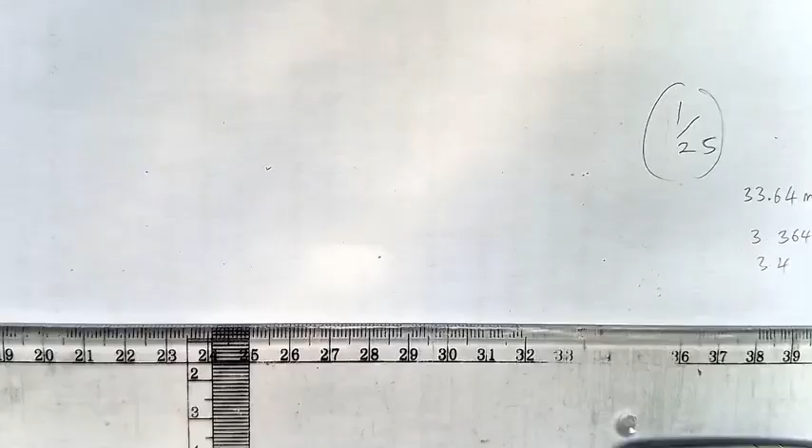From the line here, take your ruler and measure 3.4. So you mark here, this is the 30 point, this is my 30 point here, and 3.4 - this will be it. So here it's my 3.4.

On the other side, what will it be? That is 1189, which gives me 47.5, approximately, like 4.75. So that will be 4.8.

Then take over here, measure 4.8. Measure 4.8 here and draw a line. Take this, then 4.8 also, then close it. So close this place and call this one A0.

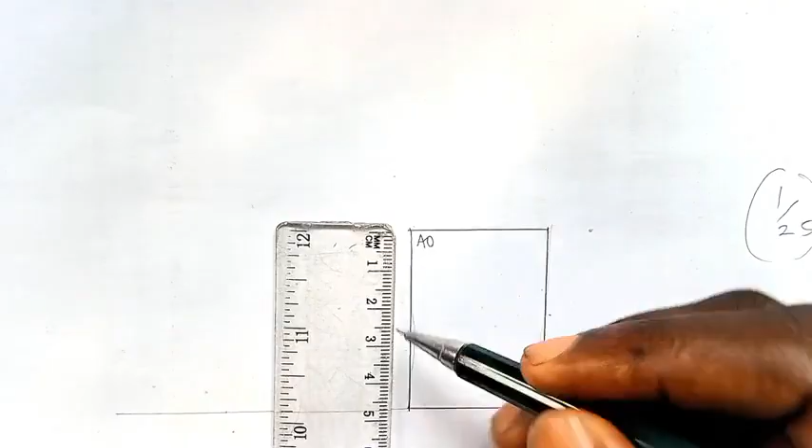Now to get A1, you have to divide it. So you divide the length of this one - that is, let's say 4.8 divided by 2, you have 2.4. So go over and measure 2.4. Then divide this. So this is A1.

Then to get A2, you divide this one. What's the length of this? That's 3.4, so you see 3.4 divided by 2, that is 1.7 approximately... come over and measure 1.7, then do that. So you call this one A2.

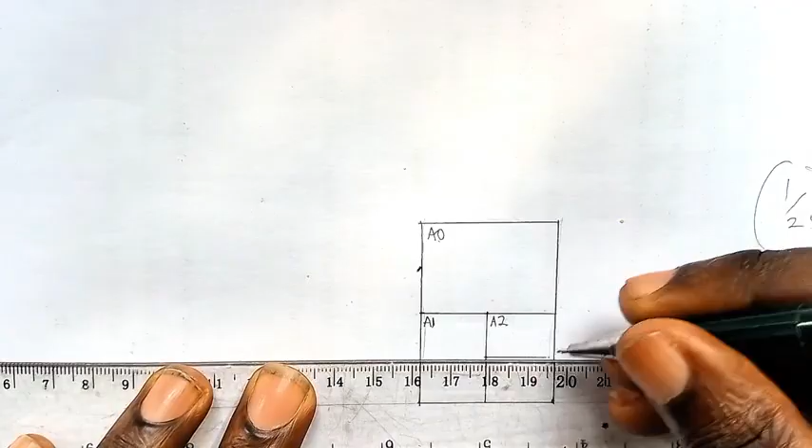Then to get A3, you divide the length from here. What do you have for this one? 2.4. 2.4 divided by 2, that is 1.2. So mark here 1.2, and you draw a line. You call this one A3.

Then to get A4, the length from here to here, that is 1.7 divided by 2, that is 0.85 approximately 0.9. Then measure 0.9 here, then come over here and draw a line. And this is A4. Then that is it.

So the distance between the two board lines is 20mm, and the guideline is 4mm for each board line. The length is for capital letters A to Z, 0 to 9, with your own base letters.

So the first thing is that you draw a line here, a horizontal line. For that horizontal line, you measure 2 centimeters - you measure 2 centimeters here, then you connect this to this base.

So you measure 0.4 centimeters up and down. Also come and do it here, the same thing, and draw a line. So your board line should be thick, and your guideline should be thin - you get me?

Then your guideline, construction line, should be a thin line, very light. Then you start your ABCD, your letters.

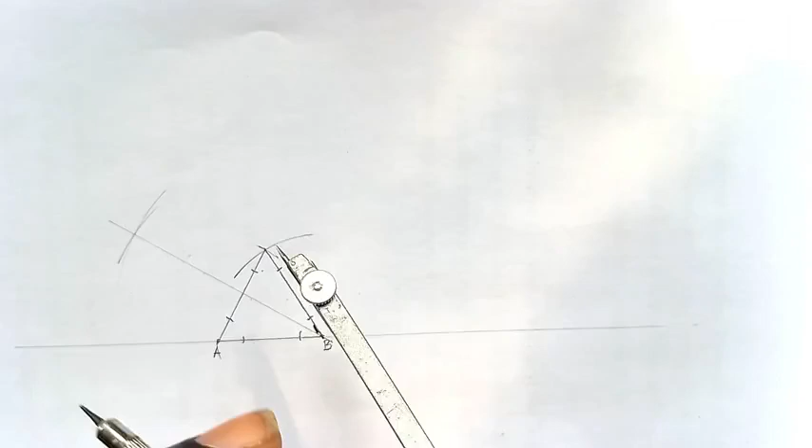Also come over here, do the same thing. You have this, you have this. Then come over here from here, you will find the point here, and you connect this. Then do for this one also, for this part. Can you see it?

So you meet it from here. You locate the point to this point. And you meet it, then what next? You place it here, check it at this point here, and reduce it to this one from here to here. So check your compass here, check it here, and look at the other side. If it's good.

So then, can you see? Then I've inscribed the circle. So the next one, say do the same circle to do the circumference of the circle. So you will take it here and extend it to this end point at A here. Can you see? To this A here. And then you do a bigger circle.

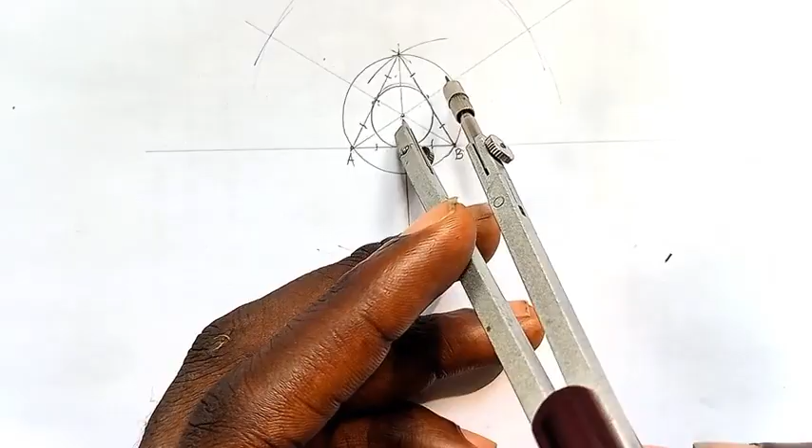So that's how to do it. Inscribe an isosceles triangle into a circle of radius 15 millimeter. So first we are meant to draw using radius 15. So for us to use radius 15, what do we need first? First thing that you need to do is that you take your compass and measure, what is 15 millimeter converted into centimeter? That's 1.5 centimeter. Then measure 1.5. Can you see? 1.5 centimeter.

Then position it here and draw a circle. So when you have drawn a circle, the next thing is that you take your set square, angle 60 degrees, and put it at angle 30. Can you see? At the center that you get, you will move it with your T-square. And do a line to this point. Can you see, construction line? Yeah, move to the other point and do a construction line. So now when you do a construction line, what next? What are you doing next?

Come over here, you place this to this point, and you're taking here to this point. Place it on your T-square. Can you see? And then, from here to this place, you're taking it. Can you see? I'm having an issue with my... Then turn to the other side and do the same thing. Can you see? And take your T-square and use it to join.

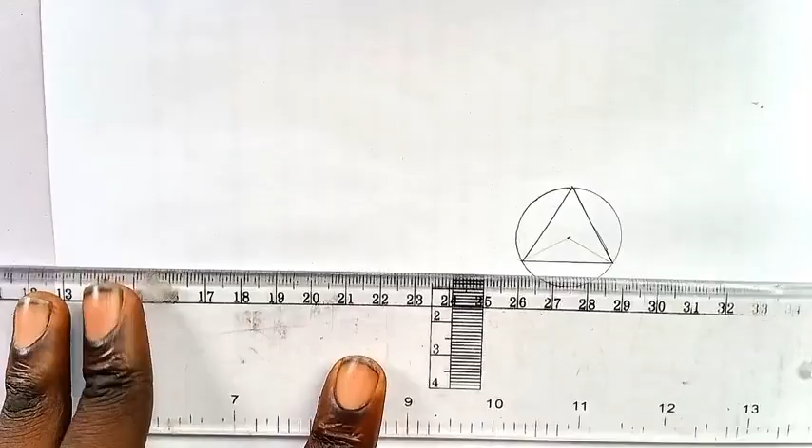So you have drawn what? The inscribed isosceles triangle into a circle. Cool, thank you. Continue with the next question.

Use the auxiliary circle method. Draw an ellipse. Radius of the first circle is 15 millimeter, and radius of the other is 25 millimeter. So before you draw it, first take your T-square and position a center line. It should extend long, this line, and long, long. So when you do that, the next thing that you do is that you take here from the midpoint here and cross this, long, long, long.

Can you see? Now when you have done that, what is the first radius? They say that the first radius is 15. So you come over here, you measure 15 millimeter converted to centimeter, that's 1.5. Can you see? Then come over here, check here at the point here, and draw a faint circle. Can you see? Then the next one is what? 25. Then you measure 2.5 centimeter. Then place it at this here, and you draw a faint one.

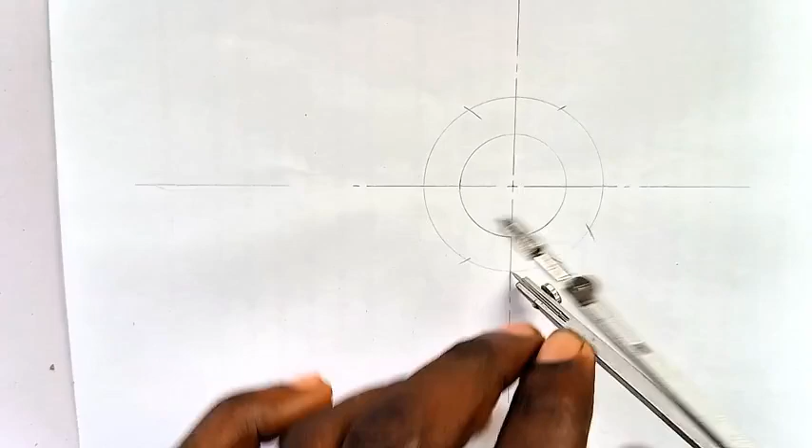Then you divide the line into 12 parts. By dividing the line into 12 parts, you can use your compass by placing it on the horizontal part. Can you see? Horizontal part, mark the up one and the down one. Then come over and do the same thing at the other side. Mark the up one and also mark the down part. Then place it, when you are done, you also place it to the vertical one and do the same thing. Mark the other part and this, and place it here. You mark this and you mark this.

So now when you have marked it, what next? You place this in the middle point. You place this here and locate the midpoint here at the center here. This, when this meets to the center line of this, so you draw this construction line. Can you see? Next, also do the same thing. You place this and this one here. Can you see? To the center line here. Draw this. Then the next thing, also do this.

Can you see? So can you see it? So you come over here and do this, place here to this point, construction line, don't go yet to this place. Can you see? Now if you count it, this is starting. You can start with 0, 1, 2, 3, 4, 5, 6, 7, 8, 9, 10, 11, and 12. Can you see? So now when you have divided this into 12 parts, the next thing that you need to do is for the bigger circle, to know how to divide it, the radius of the bigger one is what you will use to...

By divide the bigger one. If I want to do for the smaller one, also I will use the radius here and I will divide it so I can have 12 parts. So let's start for the bigger one.

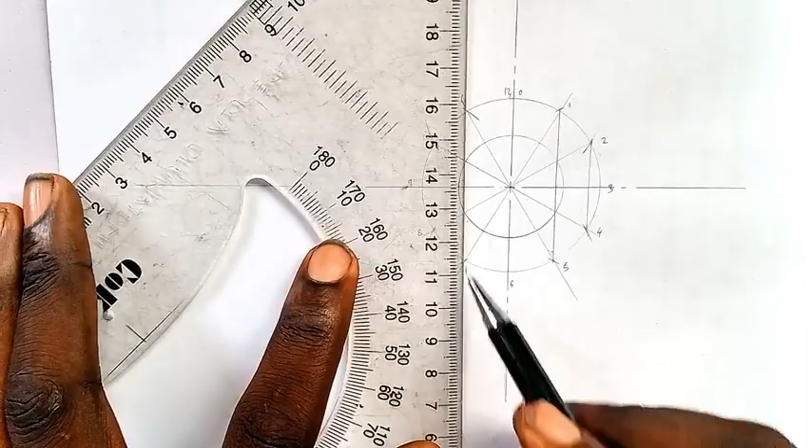For the bigger one, you draw your line to be vertical. For the smaller one, you make your line horizontal. So you make these points at the edges of the bigger one vertical - construction line. Then for this one, 1 and 5, connect it. And 11 and 7 vertical, and 10 and 8 vertical.

Then the next thing is that you come from here, starting with 11 and 1. So let's put it like this. Make sure 11 and 1 meet. So you can see that we have this point and we have a point here, and we also have a point here.

So the next thing is that 12 and 10, 2 and 10 meet at the ending point of the smaller circle. That's where you can see at the ending point here. So you build this one. Then the same thing here - that is 5, 8, and 4. The end point of this place to this place, then the end point of the circle here.

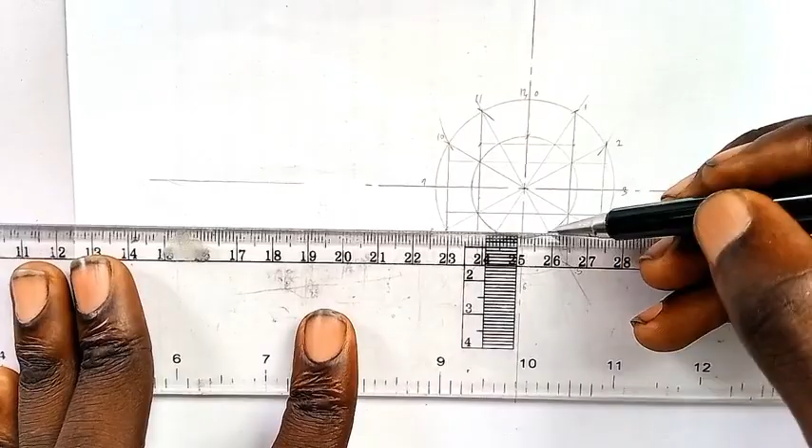So the next thing is that you get a French curve. I'll be using this French curve, the one part. Because this is too small, I'll prefer to use the smaller part. So using the smaller part, first I will take 3 points - you know, your idea, your graph, when you take 3 lines, you take 3 points. So I'll place this here and take 3 points first.

Can you see if I'm not seeing my 3 points? Can you see, I'm seeing it. So I will take from this part to this part. Then the next thing I also do the same thing here, taking 3 points - you see that I turn it. This is why I put this. I turn this to the side because I have equal parts, so place it here and turn it until I have a perfect 3 points.

Now when I've done that, then I'll come over here. I've done the vertical line, I'll do the horizontal when I have 3 points. Can you see it?

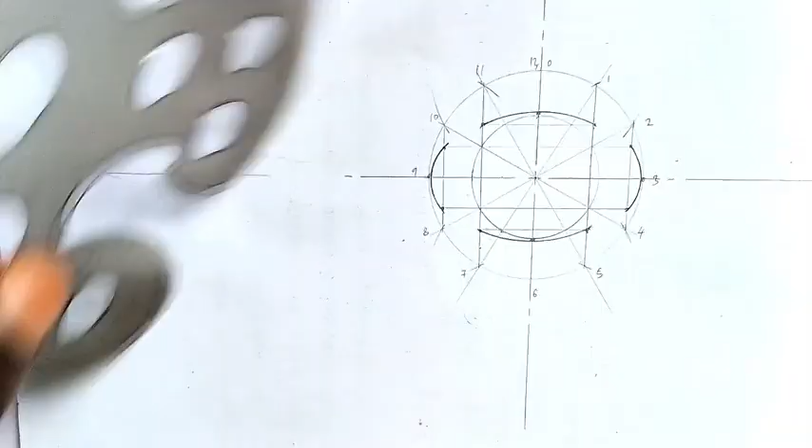So can you see? Next thing I will now blend it. Now when I've gotten that, I'll blend it, so I'll be blending it. In this phase, I must be careful when I'm blending. Can you see that I'm getting careful?

So can you see? So these are to do our ellipse.

Next question: construct an Archimedean spiral with a radius of the circle given as 58 mm and distance from the center of the circle to point O as 10 mm. The circle should be divided into 12 parts - so we are meant to divide the circle into 12 parts.

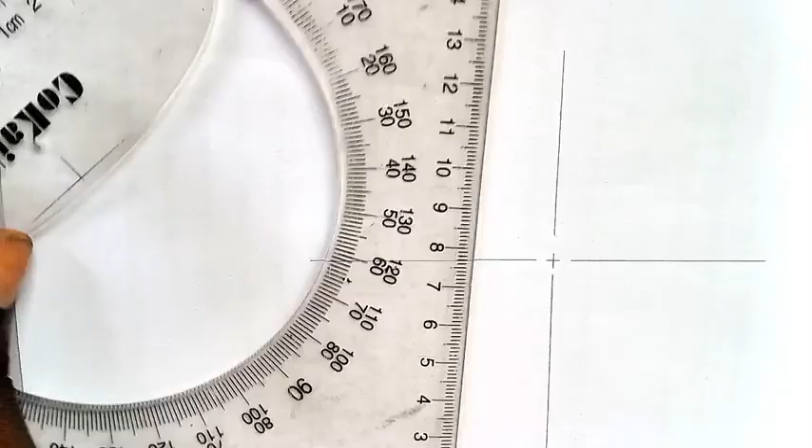So before we do that, first take your ruler and draw a center line, which should be a chain line, long. Come over here, do minus long. Now when I've done that, the next thing is that we are meant to - the radius of the circle is what? The first instruction said that what?

Draw a circle with radius 58. So we measure 5.8 here, can you see? Then come over here and draw a concentric circle. Can you see?

Now when you have done that, you extend this center line.

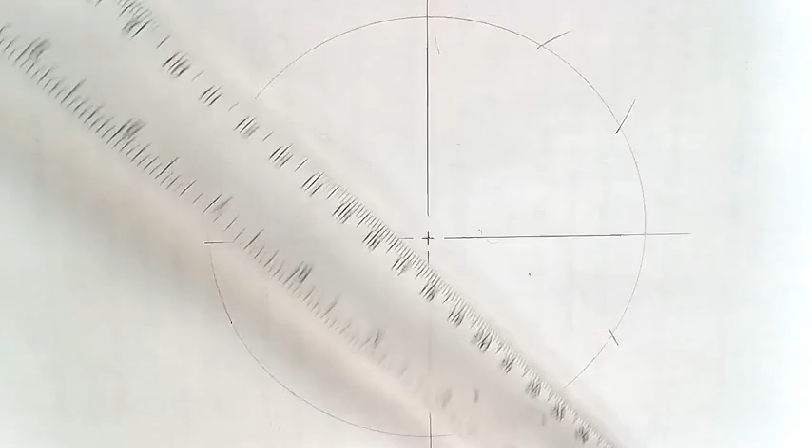Okay, you bisect this by cutting this one, and come over here. You do this one, cutting this, and come over here from here. Cut this. So when you cut it, take your ruler, position this from here to the middle, and draw a position line. Same thing from here to here, and over here, and from here to here.

So now when you're doing a position line, from the center, you leave all the distance of 10 mm, so 1 centimeter from here. Can you see? Mark here 1 centimeter.

Then if you want to say that we divide the circle into 12 parts, and you want to know how many circles we are going to put in this place, you take here and take your measure. What's the total length here? 48, 4.8 centimeter. So 48 divided by 12 gives us 4.

So the gap between each circle will be 4 mm, which is 0.4. So what we do is, I know that from here to here, from this first line to this place, is 10, so 1 centimeter. So to get this, that is 1 centimeter plus 0.4, you get 1.4 centimeter.

Then you take a compass and measure 1.4 centimeter here. Can you see? Then you use it to mark the second line, just mark it, or you can draw a circle.

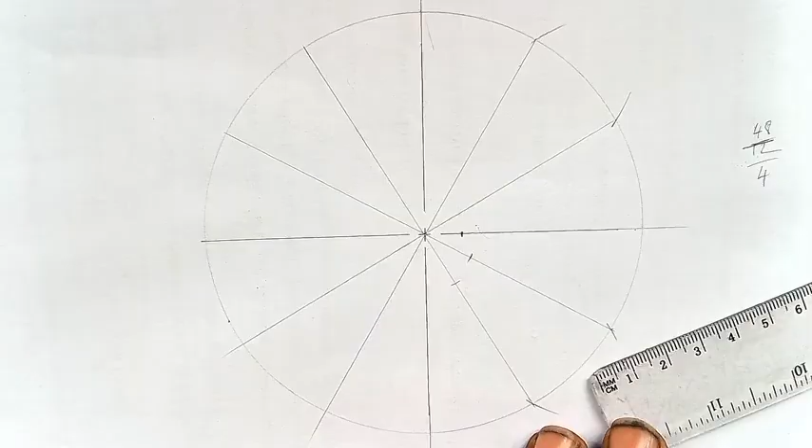Can you see? So the next one will be 1.6 plus 0.4, that is 2 centimeter. Then for this one, you mark 2.

Then next one will be 2 plus 0.4, which is 2.4. Place your compass at 2.4 here, then place it here, and you mark.

Can you see? So the next one will be 2.4 plus 0.4, that is 2.8. Can you see?

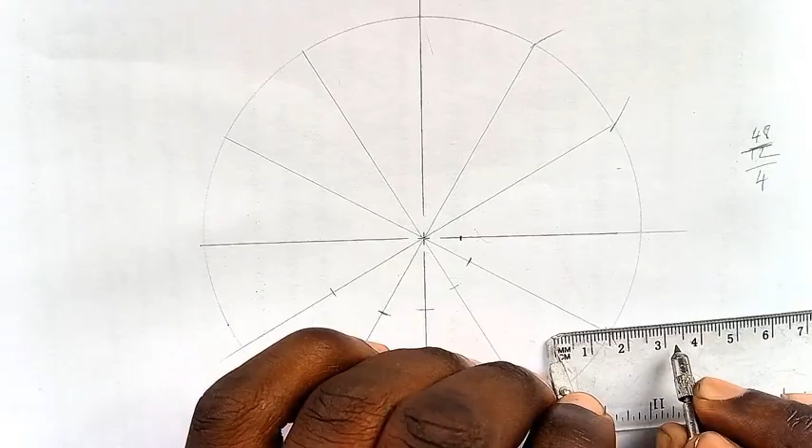Then you place it here and mark. Then the next one will be 2.8 plus 0.4, we have 3.2. Can you see? Then come over here, you mark.

Then the next one will be 3.2 plus 0.4, we have 3.6. Can you see?

Then you mark. So next one will be 3.6 plus 0.4, so we have 4 centimeter. Then you mark here.

So the next one will be 4 plus 0.4, we have 4.4. You mark here. Then the next one will be...

4.4 plus 0.4, we have 4.8. So come over here, mark here. So the next one...

4.8 plus 0.4, we have 5.2. 4.8 plus 0.4, that's 5.2.

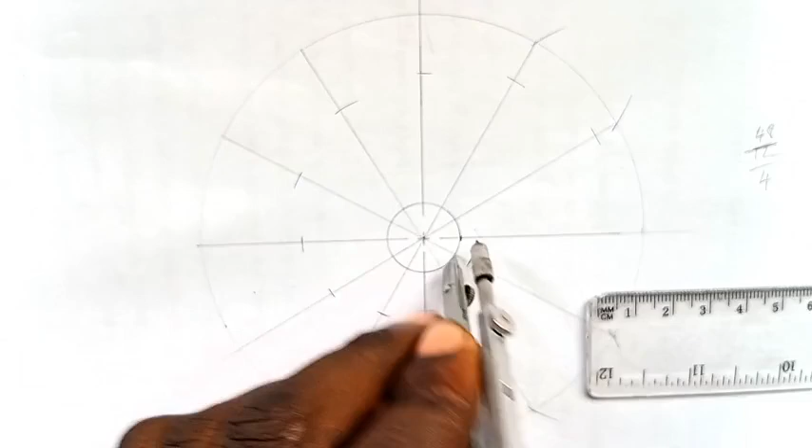So when I get to 5.8 here, what we do? Come over here, for this, you do the circle for this one. Can you see this? You do a circle for this. So next thing is that you now take from here, you extend your compass from here, so now you will show this piece, step compass from here, you use to mark this one by taking it. Can you see? Then next thing, you place your compass at this point, extend it to this point.

But you can use your French curve, the best option is using your French curve. So don't use that, use your French curve. Yes, taking this here, then you can do this side. Then you can do this side. Can you see? So this is how to do it.

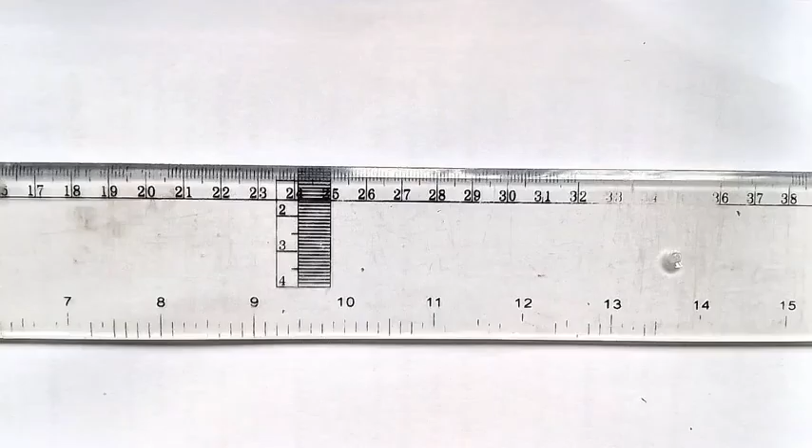Thank you. So the question says: inscribe a circle into a square with a given size of the square of 35 millimeter. So before we do that, first you take the T-square and draw a horizontal construction line. So from there, I'll give this space as my A. So from A to B, we're given 35 millimeter. So this is the point of A, and from here, from A to B, it will be the point. So this is my B. Do you get it?

So now I've gotten my B, what next will I do? So the next thing I will do is come over here and take the measurement from here to here. You see? Then I'll be using the parallel principle by marking this point.

Marking this, I'll draw an arc here. Draw an arc here, then place it at point A and draw an arc here. Then at the edges of both arcs, I'll draw a fade line. At the end of the circle point, I'll draw a construction line, a fade line here.

Now, when I've done that, the next thing I'll do is take my T-square and project a vertical line at point A. Taking this part, then I'll place it at point B.

Taking this, then connect point A and point B together. And also connect this and this together. Then what next do you need?

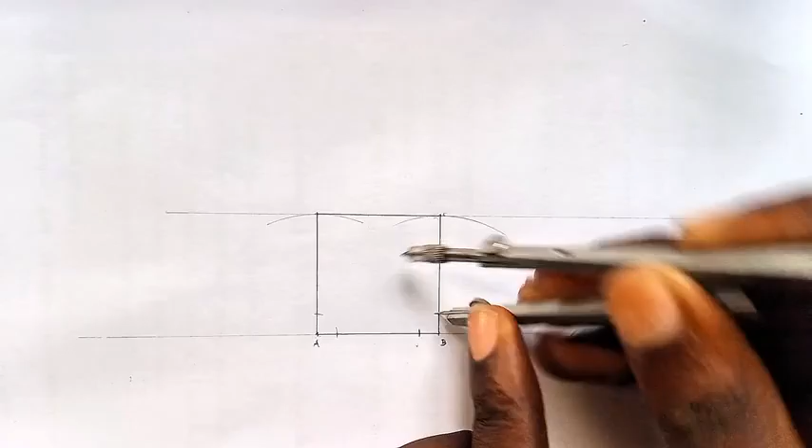Then I will extend my compass any length I want. You see that I didn't take a measurement. So I will place it at that arcing point I just marked and draw an arc at point B vertical and draw an arc at point B horizontal. Then take my ruler and place it at point A and the intersect point of that arc.

Then I also do the same thing at this point. Arc this, arc this, then connect it, from here to the center here.

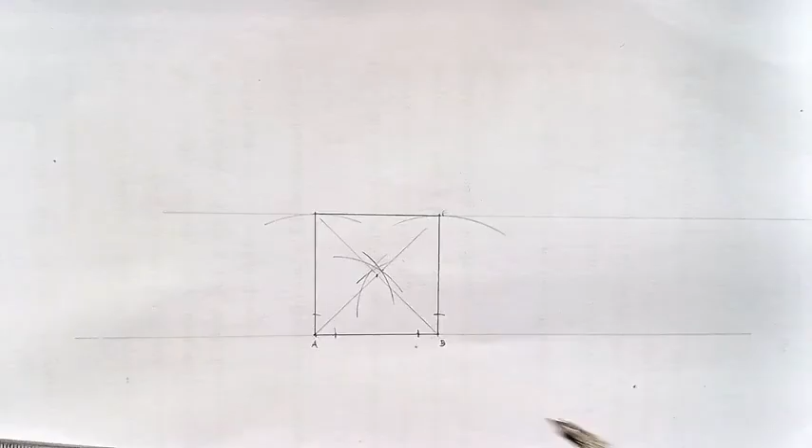Now when both of them meet, this is our point here. So now because we have gotten the point from here, we'll take our compass and extend it to the point here, and extend it to the ending of the square. Before we confirm to curve, we must test: is it at the edges?

So it's at the edges. So you draw the circle. Now we have inscribed a circle into a square with the given size.

35. So the next one should say: use the four-centre method. Draw an ellipse, taking major axis as 160 millimeter and the minor axis as 120 millimeter.

So the first thing that you need to do is come here and draw a perfect center line. So it will be minus, long, minus, long, minus, long, long, minus, long, minus, long. Then I will take any point of the minus here and draw long, minus, long, minus, long, minus, long.

Now, when I've done that, the next thing is: what's the major length? The major length is 160 millimeter. Converting to centimeter, that is 16 centimeter. So what's the midpoint of 16 centimeters? The midpoint of 16 centimeter is 8 centimeter. Then I will take this here.

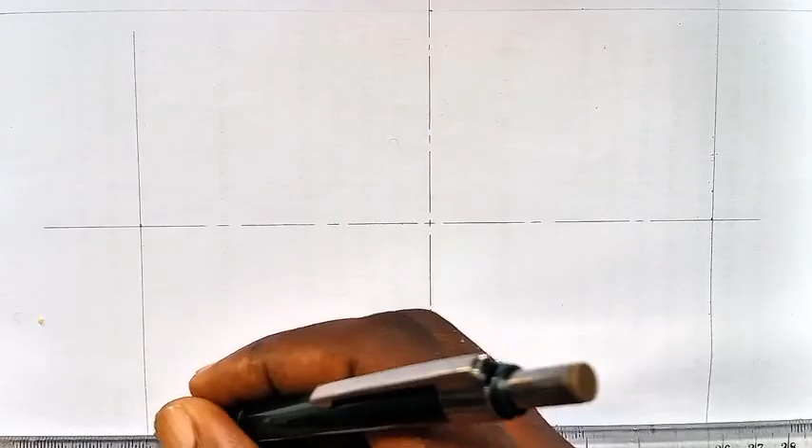So when you have done this, I'll make this one as A, B, and I'll call this C, and this one D. Then next, you will connect line A, point A, and point C together.

Then you call this line that is meeting the vertical line, you call it E. Then from C to E, you extend your compass from C to E here. Then use it to mark the line AC.

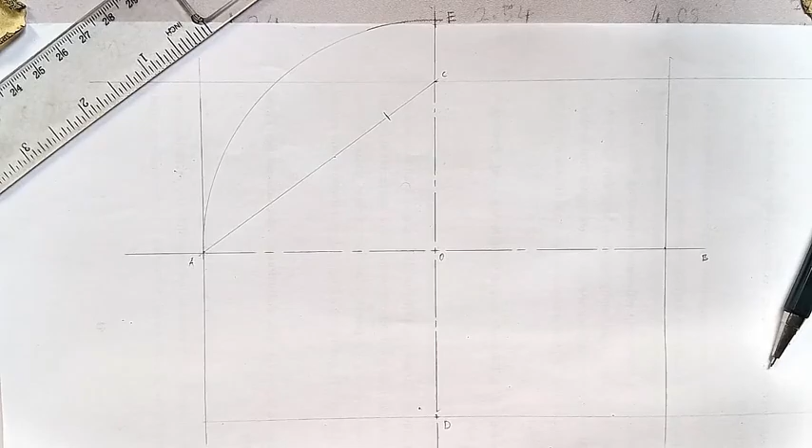So when you mark the line AC, how do you bisect a straight line? To bisect a straight line, you will make sure that your compass is greater than the center of the line, greater than line A to C. So when it's greater than this, you will shoot it at this point here.

So I will call this one F. Place it at F here, you mark, track an arc here, and track an arc down. I'll place it at A, you track an arc here, track an arc here.

So extend that from F. Then after you have done that, you come over here, you place your compass at this point, at the point they meet. I will call this point, you extend it down. Let me call this G and this H. Now where this meets, you have gotten the point here.

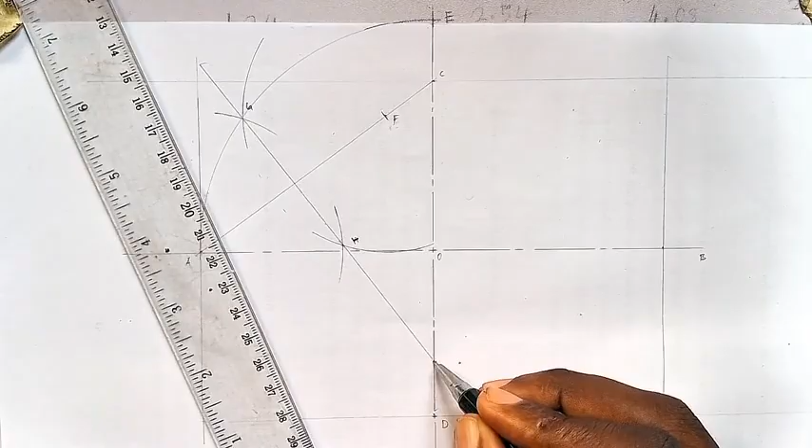So now you take your compass, you extend your compass to the center line here. Then use it to mark here. So you call this,

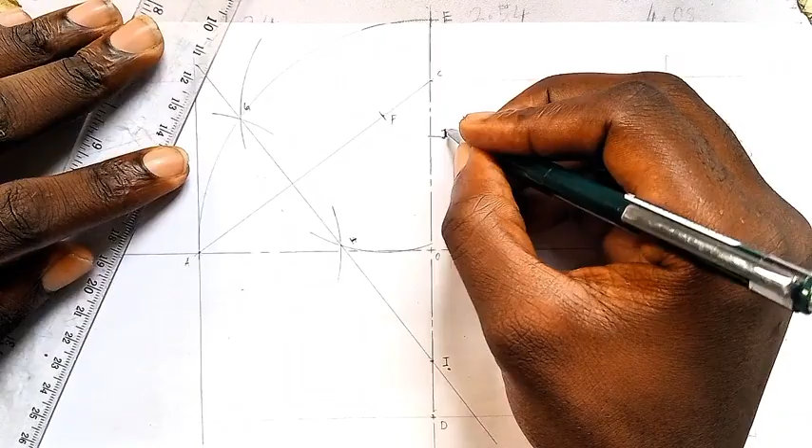it's called I. So you connect I and the line of... you connect I, this is I, and then this is J. So you connect the line, you connect the point I with the line what?

GH together, where they meet at the center point. So this is the meeting point, the point of GH. So you connect the point here, then you draw a line.

Can you see? Then you come over here and take your point. So this point here, I will call this point that they meet. I will call this K.

So I will take my compass at point O here, and I will use this to this point K here, and I'll mark this, which I'll call L. Then I will connect I and L together, the point I and L together, and also connect the point J and L together.

Now this means that I've gotten my point here. So next thing that I'll do is come over, I'll place my compass at this point I and extend it to this point C, and I'll do my curve from the line of what?

K. Can you see this line of K? I'll thicken it to this line of L. Also place it at J here, the same thing that I did.

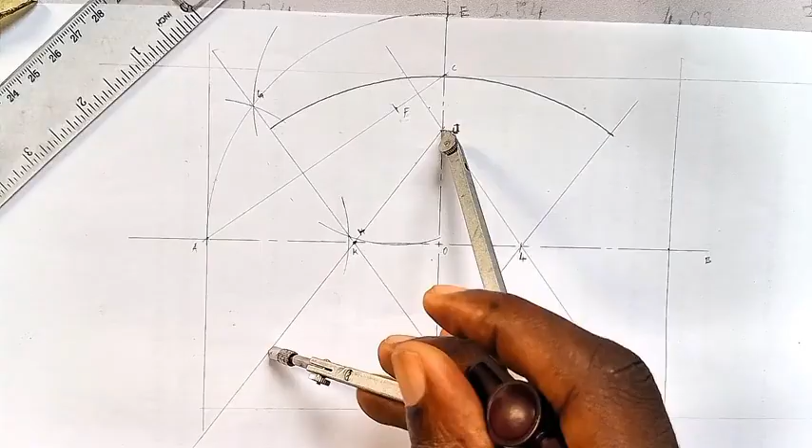Then thicken it. Can you see? Then place it at K, and extend it to this point, to the curve here. Can you see it? When you extend to the curve here, also check it here.

So when you do that, what will you do? Thicken it. Then the same thing, check it here. Then thicken it. Can you see? That's how to draw it.

That's how to draw an ellipse with the 4-center method.

So this next, second question says: construct a cycloid of a circle with diameter of 24 mm. Circle should be divided into 12 parts. So how do we do that? What we need is to take our T-square.

Can you see? Draw a perfect center line, chain line, which is long-dash, long-dash, long-dash, long-dash. Then you come over here and continue this long-dash.

So what did they give us for the diameter? 24. And the midpoint of 24 is what? 24 converted to centimeter is 2.4. So 2.4 divided by 2, that's your 1.2. So I measure 1.2.

Place it at the point here, point O. Draw a circle. Now when you have drawn a circle, what next? By construction, divide the circle into 12 parts.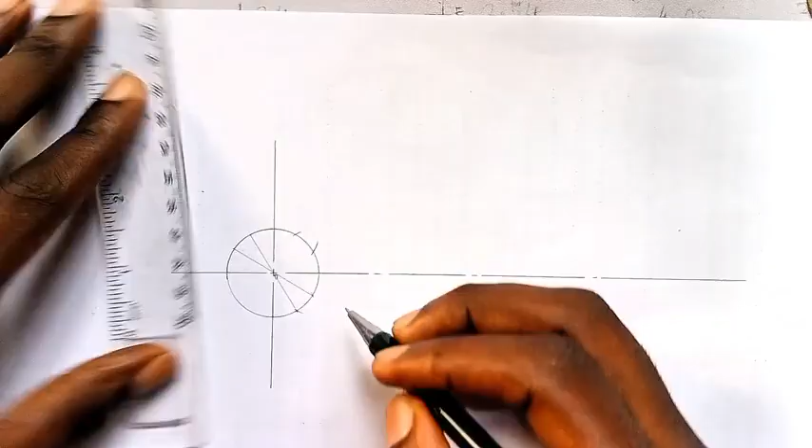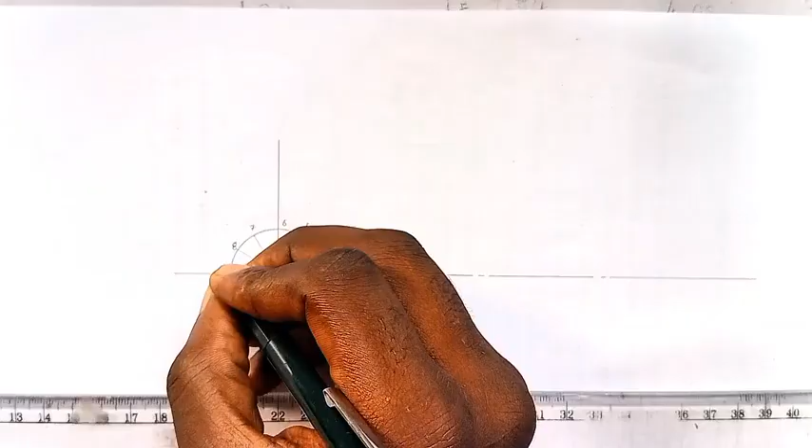Now, when you have constructed, what next? Take your square and place it here, project a vertical horizontal line starting from this. So I'll number this: this is O, this is 1, 2, 3, 4, 5, 6, this is 7, 8, 9, 10, 11, and this is 12.

Starting with this, come over here, project a construction line down. Connect line 11 and 1, project it down, connect 10 and 2, project it down, then go towards 8 and 4, project it down, then 7 and 5, project it down, then 6, project it down.

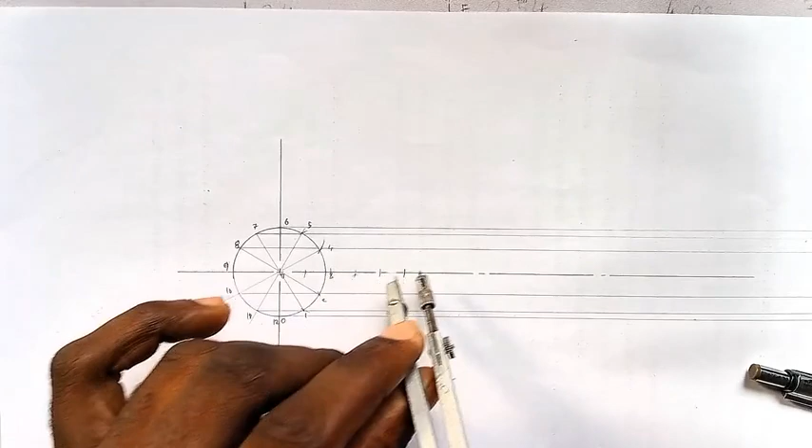Now when you have done that, the next thing is you come over here and measure the length that you use for the bisecting. Start from the point here and mark this in 12 parts: 1, 2, 3, 4, 5, 6, 7, 8, 9, 10, 11, 12.

So put the numbers 1, 2, 3, 4, 5, 6, 7, 8, 9, 10, 11, and 12. So for this, you will take your T-square and draw a construction line, a vertical line on it.

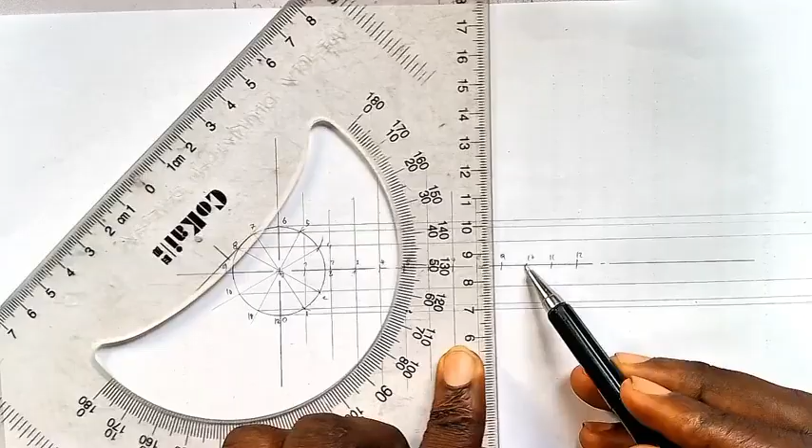Then you come over here. So you know that this is your point A. So you come from here, starting at 1. So you start from this space to this space. You just draw the circle, a construction circle.

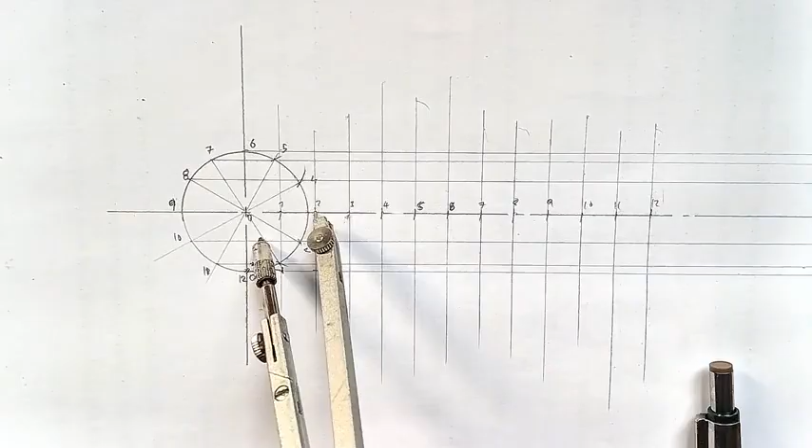So this is the first point. This one meeting here is the second point. Then place that for 2. From here to this place, to the second line, to the second horizontal line from the vertical line, you prepare a construction line. So where this point meets, you mark it.

Next thing, 3. You place it here, then draw your circle from the point here. You mark here; that is the point. Then 4. Place it here. So this is the point, so you don't confuse yourself.

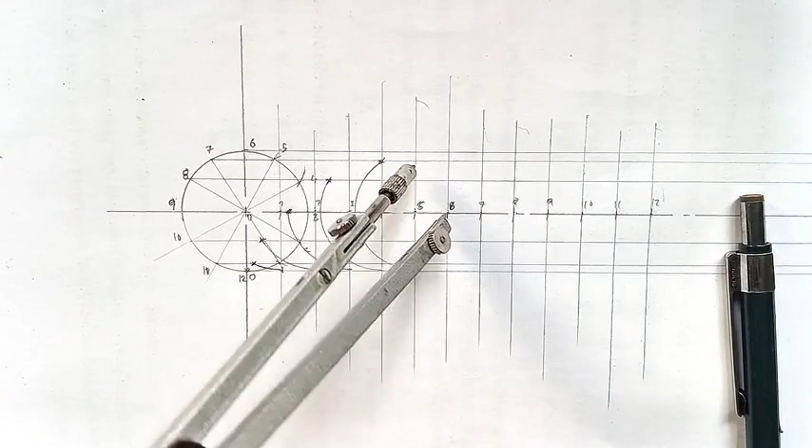Then place at 5. So this is the second line to the horizontal line to be 5. Then you mark, so place it at 6. Then you mark, then 7, then mark, then 8.

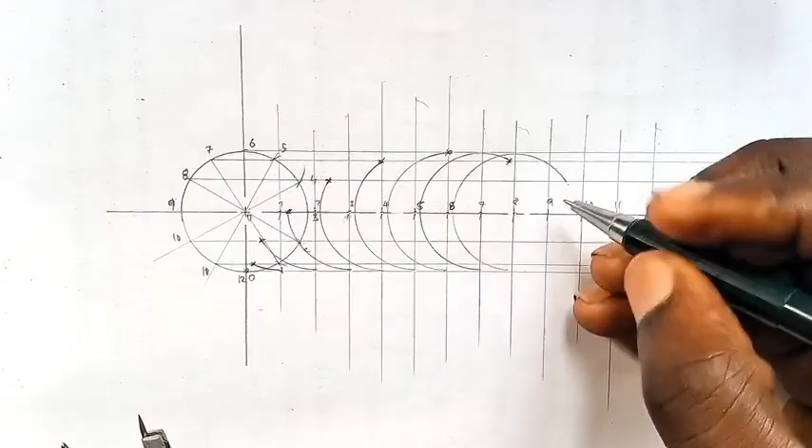It's ascending, from here it's increasing. Then here it's now descending down. This is ascending and this is descending. So this is at 9. This is 9, then 10. This is 10.

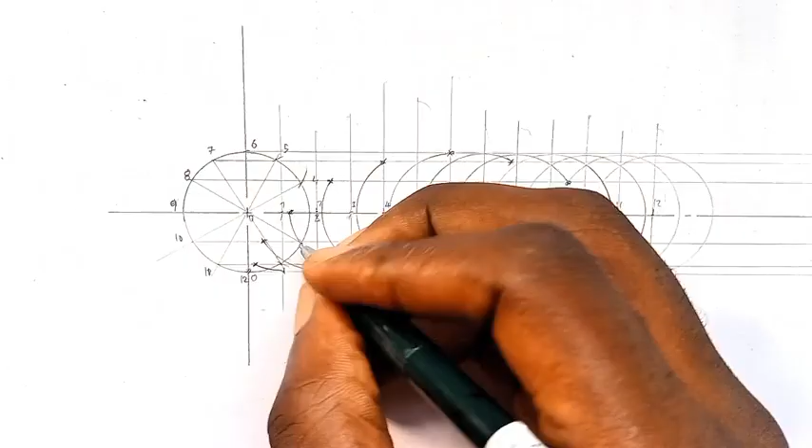Then 11, see 11 here. Then 12, so you can see, see 12. So can you see, we have the points already. So this is 0, this is 1, 2, 3, 4, 5, 6, 7, 8, 9, 10, 11, and this is 12. So then take your French curve.

So in this case, you place your French curve to the points where they are both meeting. Can you see all the line? It's meeting it. Then turn to the other side also. So can you see? This is how to draw the circular shape, taking it in its way.

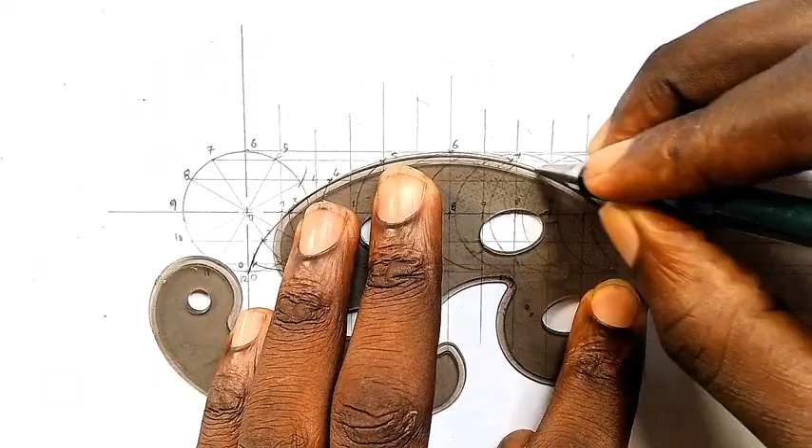So this is how to draw an ellipse. Question 4 says use the rectangular method. Draw an ellipse, taking the major axis as 160 mm and the minor axis as 120 mm. So what do you do? The same thing I did for the other ellipse that we did here.

First you draw a vertical and horizontal line as the center line. Then do long minus long minus long minus long, then compare. Do minus long minus long long minus long. Can you see?

So what was the length of the major axis? The length of the minor is 120 millimeters, 12 centimeters. And the midpoint of 12 is 6, so I measure 6 here, from O to 6 and 6 here. You come over here and draw a vertical line up as a construction line.

Construction line. Then the next thing is, from here to here is 12. 12 divided by 2 is what? Sorry, from here to here is 16. 16 divided by 2 is 8. So you measure 8 here, measure 8 here. The very line is 8.

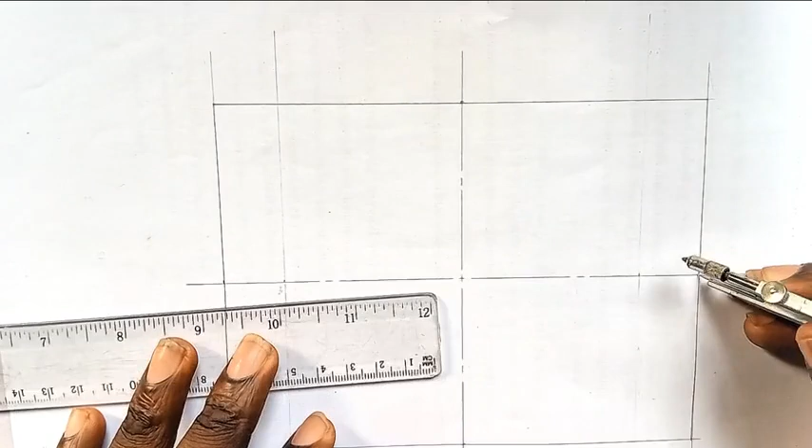So you measure 1.5. Take a compass and measure 1.5 centimeter. Can you see? Then come over here, you mark it, then come over here, you mark it. So this one from here to here is 8. 8 divided by 4 gives us 2. The first one is 2.

It's 2. So let me use this part because I don't want to use 2. So you can see that I've divided the line, even though it's 2. Let me mark it again. Then mark this point, mark this one, then this.

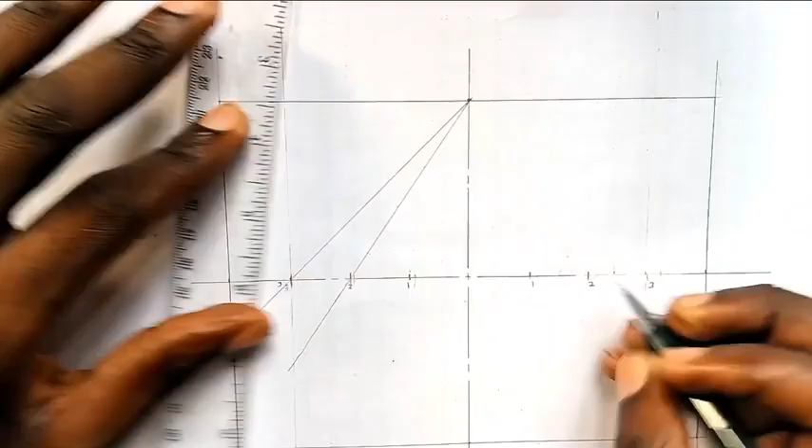So now when you mark this, what do you need? The next thing is that you connect the horizontal point to the point of the vertical point. So you connect this horizontal to the edge point of the vertical point here. Can you see? Then same thing, I put the numbers 3, 2, 1, so you connect this here. The same thing for this, do it like that. Can you see? Connect it like that.

Then also do it for the down part too, same pattern. So can you see? Then do this one also. Then this part also. So can you see? Now when you have done that, then you divide this one also the same way.

That is what? So 6 divided by 4 is 1.5. Can you see? 1.5. Then you mark 1, 2, 3, 4. So you also do 1, 2, 3, and 4.

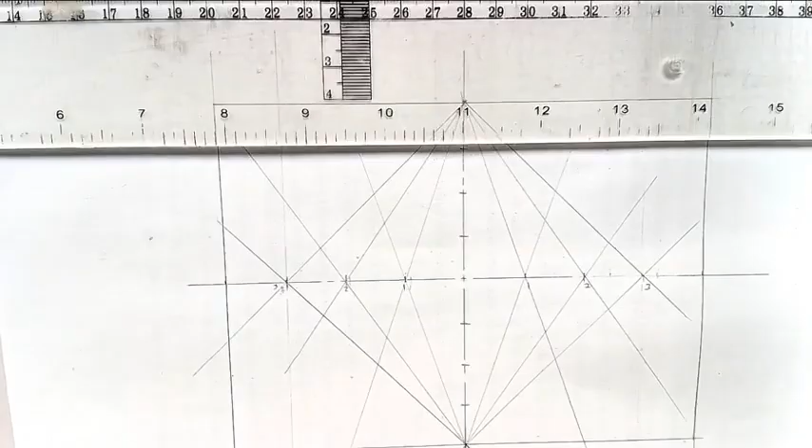So now when you have done that, what you need is you come over here, take your T-square here, and use it to mark this point. I use it to mark this one. Then you call this one 1, 1. Then place it here, you use it to mark this point. I use it to mark the edge of the point here, at the line that I did here. You call this one 2, 2.

Then take it here, you mark here, you just mark here, or you can draw a faint line. I can say that it's meeting the line here. You get me? So this is called 3, 3. Then do the same thing, you draw a faint line to mark here. So this is 3, 3. So place it to the next one, draw a faint line.

Mark here, mark here. This is 2, these 2. Then place it to the last one. Draw a straight line, horizontal line. Mark 1 here. Okay, this is 1, 1.

So now when I've done that, what will you do? The next thing is that you also connect the line here, this 3 to this edges here. Can you see? Then connect these two the same way. Connect it like that. So you connect this one and this together. Can you see? You connect this here. Then connect this point, this one.

Then also come over here. And this one also, then this. Can you see? Then come over here, connect this one. And this point. Then this one. So what you want to do is extend this one.

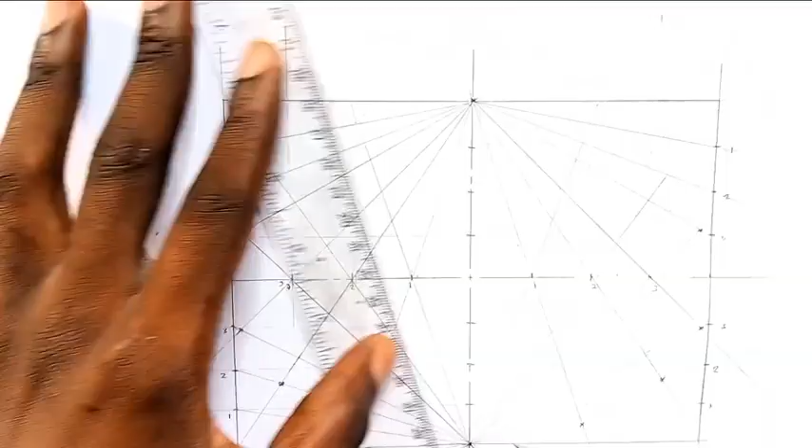So can you see 3 is meeting 3 here? Can you see? The same thing here, 3 meets 3 here. Let me extend this line. So can you see 2? 2 will meet towards line 2. Here it is, here it is. So 1 is the ending. So this one, 1, the ending. 2, the next line. And 3, the line.

So we have this point, we have this. So what do we need? Our French curve. Then using my French curve, can you see? Then you must make sure that - let's see what I will use first. Can you see this point and this one is meeting? Can you see? Then we'll do it for this one also. Can you see I'm using my French curve?

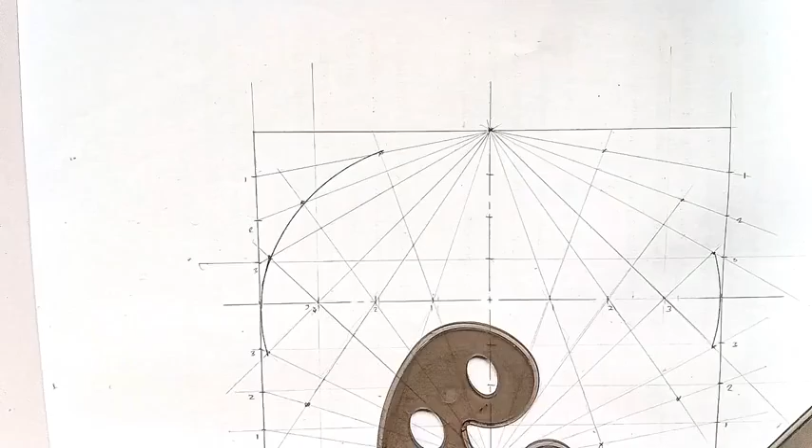Can you see it? So can you see? I'm using my French curve. You have to be careful when you're using it. So let me do the same thing here.

So now when I've done that, I can come to this point to bend it. Can you see? So that is how to do it.

Can you see? So the second question states: use the general method, construct a pentagon, hexagon, heptagon, and octagon. Take the diameter - what is it? 20. So taking your T-square,

draw a horizontal line, construction line. So when you do a construction line, what's next? The next thing is that you take a ruler, take a measurement. So let's put this one, let's make this A. So from A to here, they give us what? 20 millimeters. So I use 2 centimeters, I'll mark it to be 2 centimeters.

So from there, I'll come over here, I'll measure from here to this space. Can you see? I'll measure this, I'll do this, then come over here to the ending point of here.

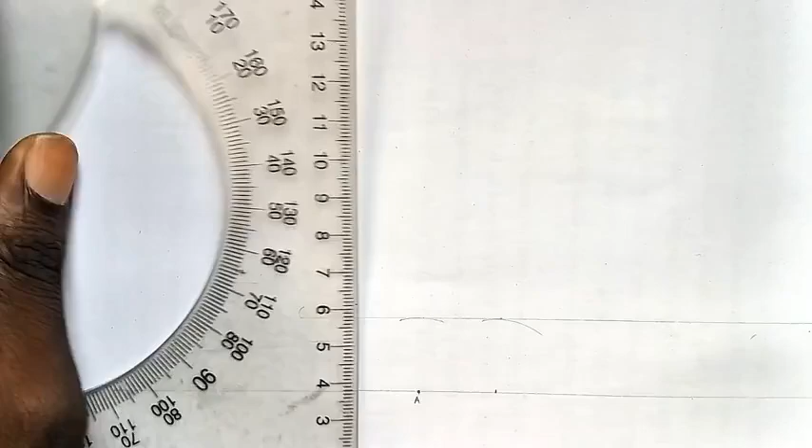I'll draw a line. Then take my T-square, and from here to here, I'll take in it. Can you see? So this is B. So this space, take it. Then come over here.

So from here, I'll find the midpoint. So the midpoint of AB is what? AB is 10, so I'll use 1 centimeter here. Then when I use 1 centimeter, I'll draw a line. Get the line up from the midpoint. Can you see?

So now, the next thing is that I need to divide the line, trying to divide the line. So the next thing is that I'll take my ruler, I connect this point and this one together. Can you see? Connect this with a straight line.

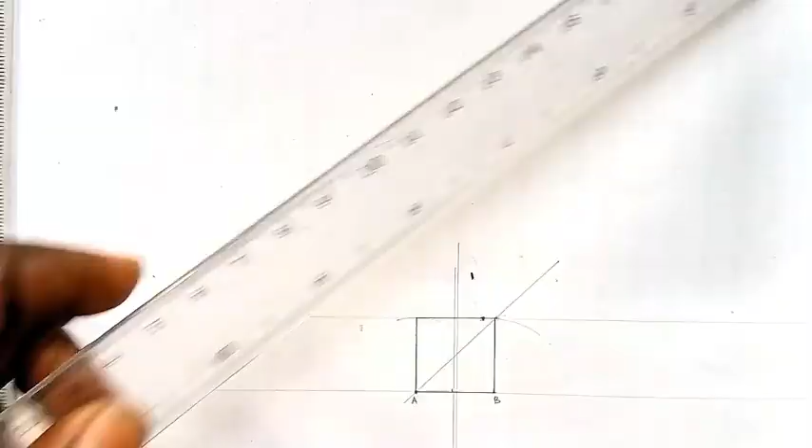Straight line. So now, when I've connected it together, what I need - I'll take my compass from B to A, and come over here. Can you see? And I'll draw a circle here. Then place it at here, do the same thing.

So now you can see that I have this point here. I'll call this one 4, and this one here at this point, I'll call it 6. Now how will I get my 5? To get my 5 is by what? I can arc it by extending my compass here. If I extend my compass here, then I'll get the midpoint of it. So take my T-square at the point.

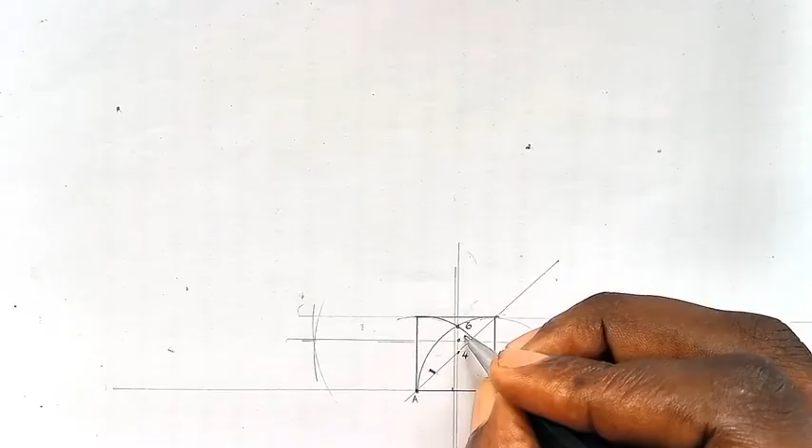Then I've gotten the midpoint, which is this. So this place is 5. Then from that place, from the 5 here, I will extend my compass. From here, I get from 5 to A. I will draw a circle. Same, the circle will be construction.

I'll draw a circle. So can you see? Then from the circle here, I'll mark here. Then come over here from A here, I'll mark here. So what I'll do is that after marking it, can you see? After marking.

So what I'll do is that I'll extend it to the same length I use for this. That's what I use to mark this. Can you see? And mark this point. So if I place it here, can you see? Okay, I'll take my ruler and join this and this one together. Can you see?

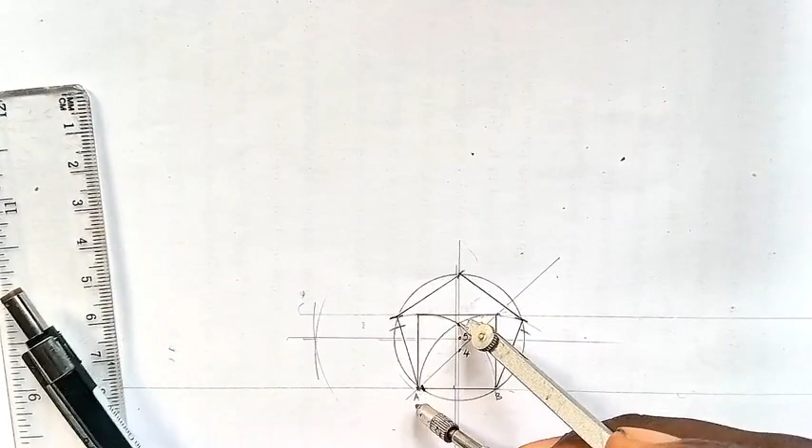Then, so after doing that, I'll take my compass towards 6 and extend towards A. Can you see? Draw a circle.

Then extend it from here, from A to B. Can you see? From A to B. I'll mark here. Come over here. Mark here. Mark it. Mark here. Mark here. Then connect it. This and this one together.

Connect this one together. Then connect this now. This together. Then connect this. Connect this. Then we continue with the other part.

Then come over here. We measure from here to this point and use it to mark this point. Mark this. Mark this. Then this is 7. This is 8. So you will place it at 7 here. Extend it to this point.

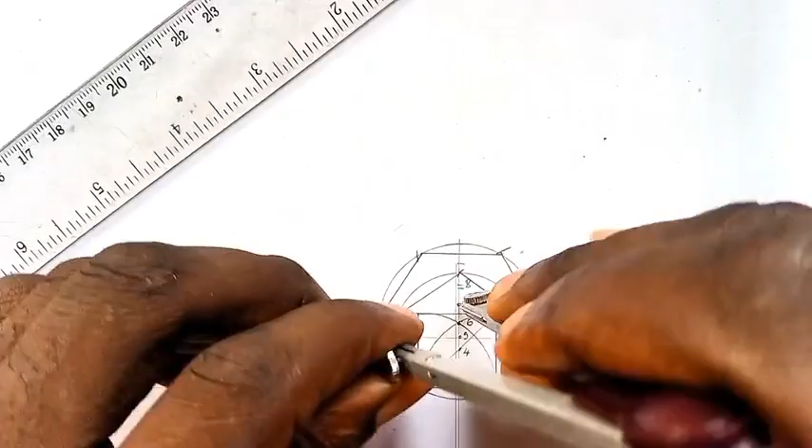Then so let me see the videos I make. Oh sorry, so I don't want to make a mistake. So you draw a circle from there.

Then place your this here and extend it to this one. Can you see? Then you mark. You come over here, you mark. Then you mark this point. And you also mark this one. Can you see? Then you mark.

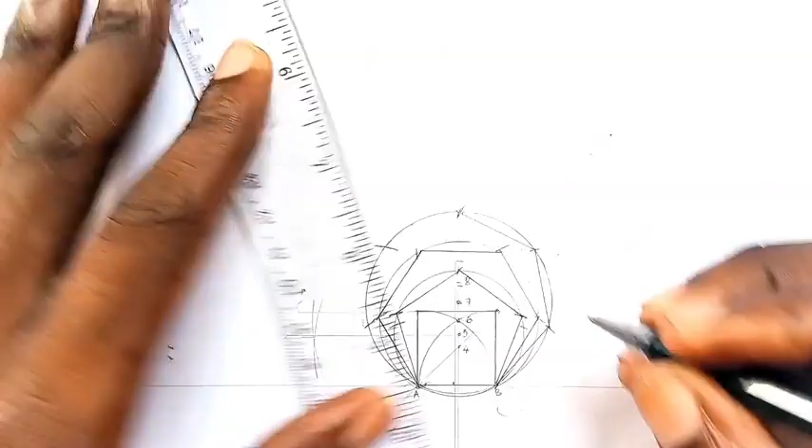You draw a line. So this is 1. This is 2. This is 3, 4, and this is 5. This is 6. And this part is 7.

So the next one is what? Heptagon, octagon. See, heptagon, octagon, that is the last one. Then you place at octagon is 8. Then place it at B, at A. Then draw a circle. That will be the last.

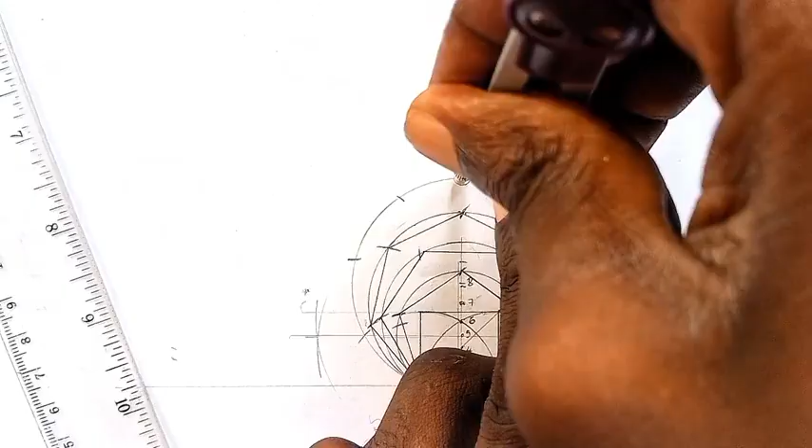Then you reduce it from A to B. Then you mark here. Then also mark the other side. Then you mark here. And mark the other side. Mark here. Then you mark the other side. Then you mark the midpoint. Then what do you do? Draw a line.

1, 2, 3, 4, 5, that will be 6, 7, 8, and that is all.

Draw the involute of a circle with a radius of 12 mm. The circle should be divided into 12 parts. Take your T-square, place it on the paper. Then, what next? You draw a chain line, which is known as the center line.

So, after doing that, then you take your set square, set it at 45 degrees. Take your ruler and draw a vertical line. Then what's the radius? The radius is 12 mm, so it will be 1.2 centimeters. You measure 1.2 centimeter.

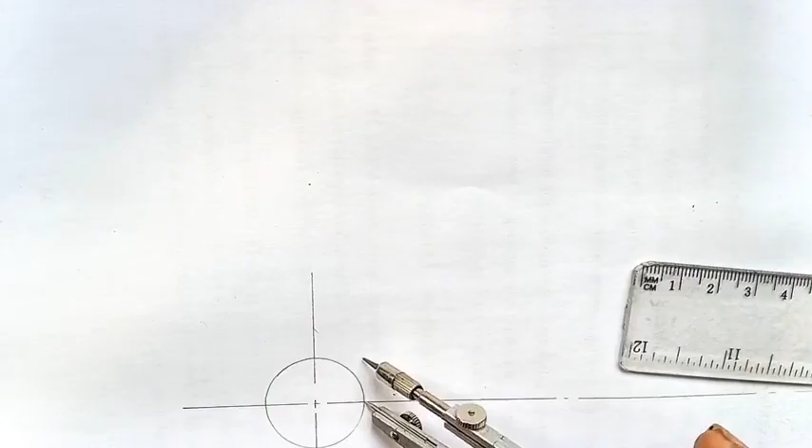So can you see? Then what do you do? Come over here, show this, and draw a circle. So dividing into 12 parts, you use the arc method. Place this on the horizontal line. Mark here, and place it here. On the vertical line, mark here, then also mark here.

Then after doing that, you take your ruler and connect the arcing point to the center point. Can you see?

So when you have done that, what will you do? You make sure that you place your ruler starting with this. You call this one O. Then you place your ruler on this point, yeah, and draw a cross-section line, straight line.

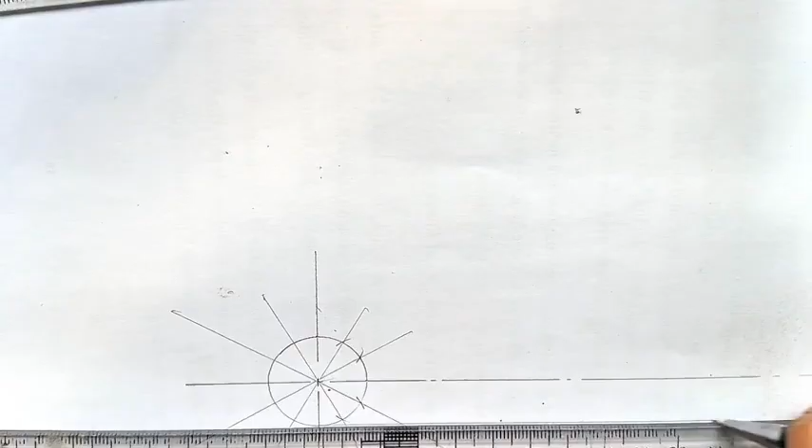So the next thing is that you will place your this, like this. You place it on top here and you place it at angle 30 degrees like this. Can you see? You place this here and you place it at 30 degrees. Can you see, on top of your T-square?

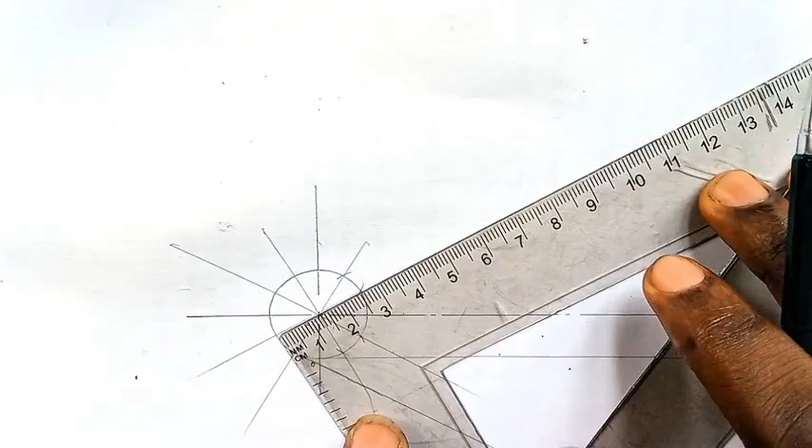On top of this line, project this. Can you see? So we continue. It's in there. Can you see? Make sure that this line is perpendicular to the line we project. It must be a perpendicular line to the line we project.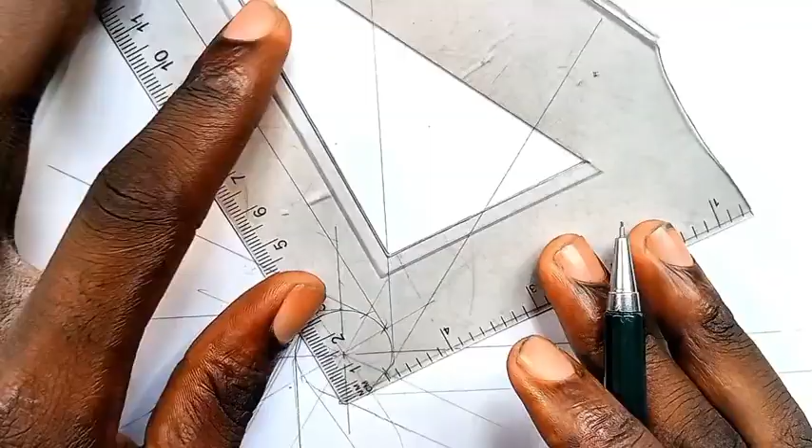I'm moving in what? Clockwise direction. So bring that and you draw this part. So now when you have done that, you now start from here. So remember that this is 0, this is 1, this is 2, this is 3, 4, 5, 6, 7, 8, 9, 10, 11, and this is 12.

So you come from, you put your compass at what? At 1 towards 0, and extend it, reduce to 0 here. Can you see? Then you take it to this point, from 0 to 1, you connect it, you take it to that point. Can you see? So from that point, you place it here to 0, take it here, then place it at 2, extend it as what? The line, the projection of what? 1, and place it at the marking of 1 and 0.

Can you see? Then taking this to 2, to the line, the projection of line 2. Then also place it at 3, extend it to the circle of 2, that is the projection of 2, and you're taking it. So that's how you do it. So this one placed at 4. Then can you see? Place it at 5. Extend it to the curve.

Then 6. Extend it. Then 7, then 8, then 9, then extend it. You extend your compass as you're increasing. Then 11, then 12, then you have done it.

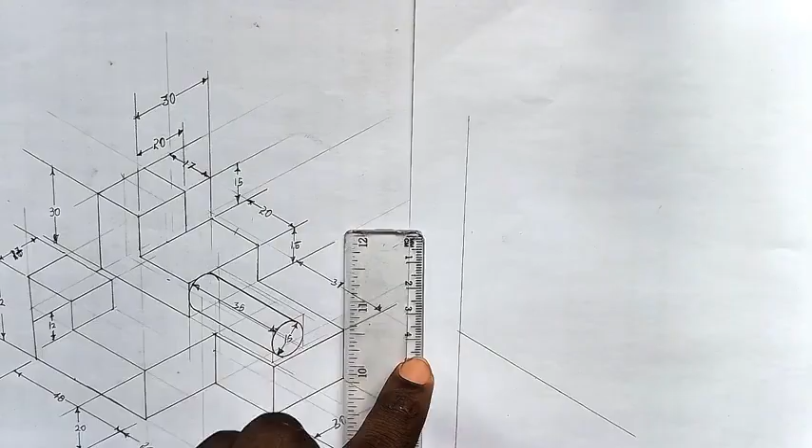It's 32, so you measure 3.2 centimeters. You mark here. You can see the length from here to this place was 48, so you come over and measure 4.8, you mark here. And you can see that the length from here to here is 20, so from here to here is 20. You measure 20, that is true.

So when you have done that, you take this. First of all, come over here, draw a line, construction line. Construct that. So after that, come over here, draw a straight line. Then here you draw a straight line. Then place this one to this place. And draw a straight line. Then draw a straight line. So when you have drawn a straight line,

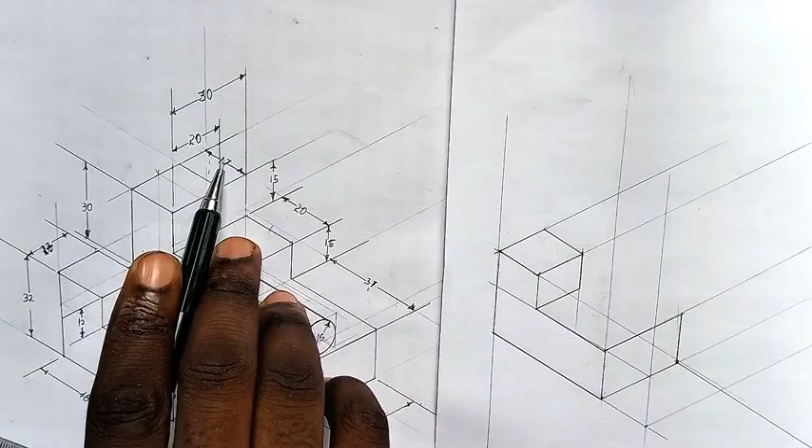now know that I've drawn this side, I've drawn this side. The next thing is that the length from here, from this to this, 37 plus 17 gives us 54. 54 plus 20 gives us 74. So 74 minus 48, so you can see the length from here to here is 26. So I measure 2.6 here, mark here 2.6, then come over here.

Taking this part, minus 2.6, then draw a vertical line. Then come over here, project this part down, taking it to the space. Then you take this part. So you can see from here to here is 30. So if I draw this side, first project this isometric 30 degrees.

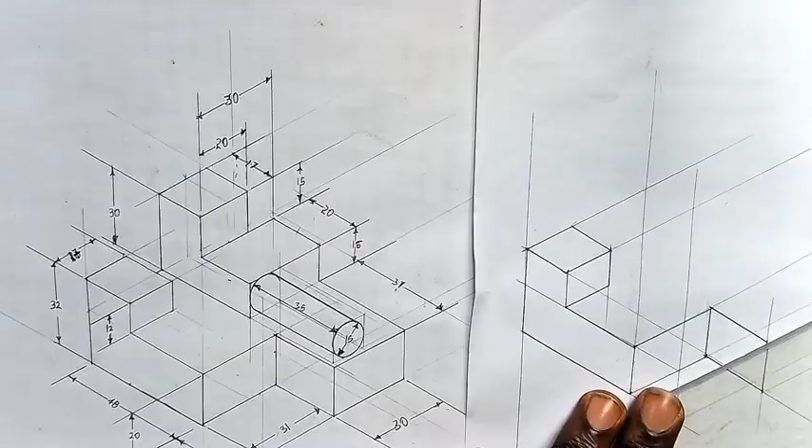Then measure here 3 centimeters. Can you see it's at 3 centimeters? 3 centimeters. Then come over here, you project this off up. Then bring this one from here to here, taking this side. Then you come over here, taking this part. So when you're taking this, you come over here and take this part.

This piece, can you see? So when you do that, you can see that from here to this place is 30, 37. Then you come over here, draw a line, construction line. Then you measure from here to here, 37, 3.7 over here. Can you see? You mark. Then you take that. Then you draw a vertical line. And project this one also.

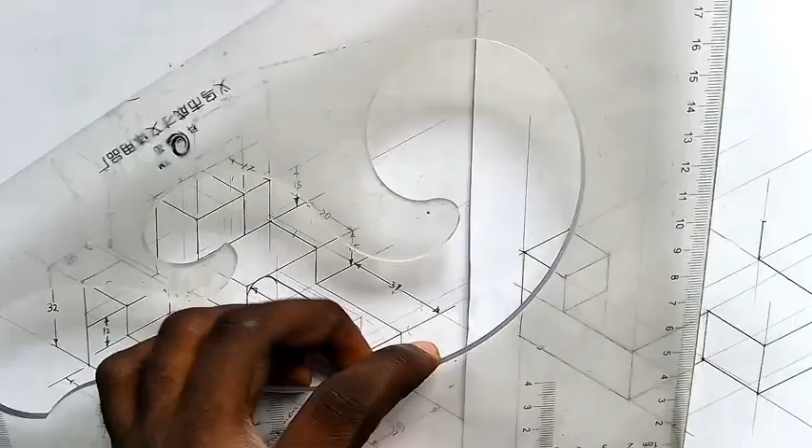So now, the problem is that you can see that from here to here gives us 15, so measure 1.5 here, and you can take it. Then from here to here is 30, you measure 30 here, 3 centimeters. Then you come over and get this line, vertical line. Then after that, you come over here, you take this part to this piece. Then take this part as well.

Then come over and get this one. From here to here is 20, so measure 2 centimeters. Then measure 2 centimeters, taking here to here. Then project this part here. Then take from that 2 centimeters to this place, from here to here. Then take this side, here to here.

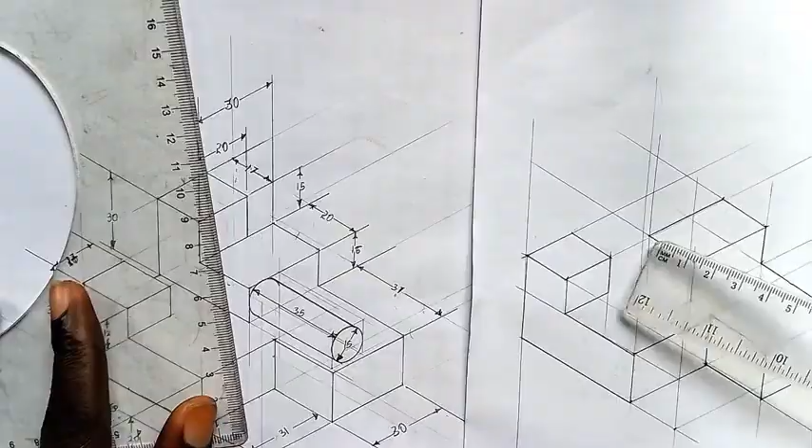Now when you do that, you project this one up. Project this one up, and from here to here, from the 30 to this place, is 20. So you measure 2, mark 2 centimeters here. Then project this up, 2 centimeters, can you see?

The height from here is 15, like 1.5. So measure 1.5 from here. Then take that place in on that side to this place. Also come over here, taking it. And here, can you see?

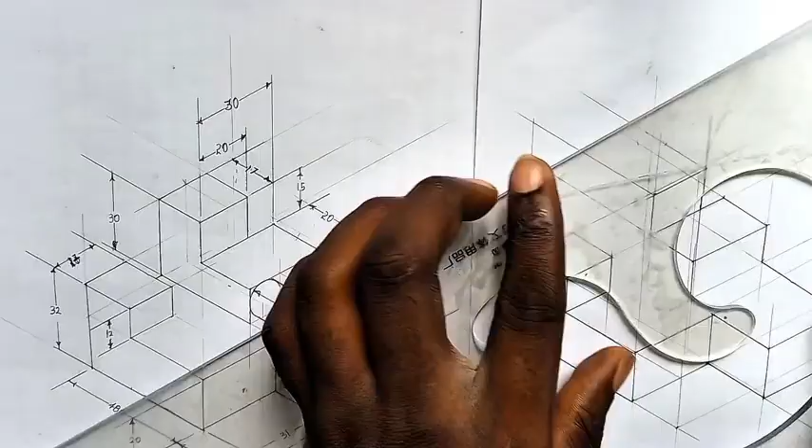So you come over here, project this one, this part to this part, get it here, and also project this one here. What they give us from here to here is 17, so you measure 1.7 here. Can you see? 1.7. Then come over here, place this here, taking here to this place.

This part here, you project this one. Then you take the down part from here to that point you projected, taking it here. Then you connect it to this one. Can you see? Then take this up one.

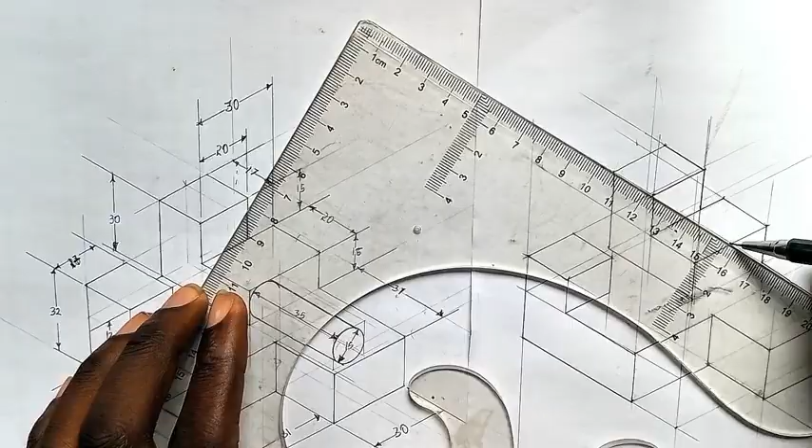Do a projection line. When you project that one, you project this one also. So now what is the length? The length is 35, so from here you measure 35, 3.5. You mark 3.5 here. So when you mark 3.5, you come over here and take your measurement here. You do this line like this. You come over here, you also do this one to connect like this. So where that one meets, you place this one down and close it to this place, box.

For a box first, can you see? So when you do that, to now do an isometric circle, what do you need? You will place this to this here, to this line here. Can you see? And do like this. Place it to this ending point like this, and place it here to the other point here. Can you see the ending point here? Do like this, then connect this one and this together. So can you see? So where they meet is where you place your compass.

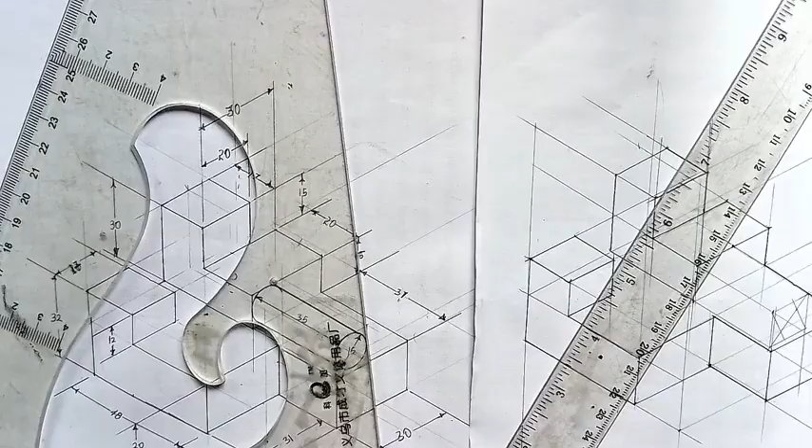First thing, you take your compass like this on top this, choke it here, and use your compass to the length. So I'm coming, so you can see. Then I will come by, I think when I've gotten the point. Then the same thing also. Can you see? Then extend it to the other side. Can you see?

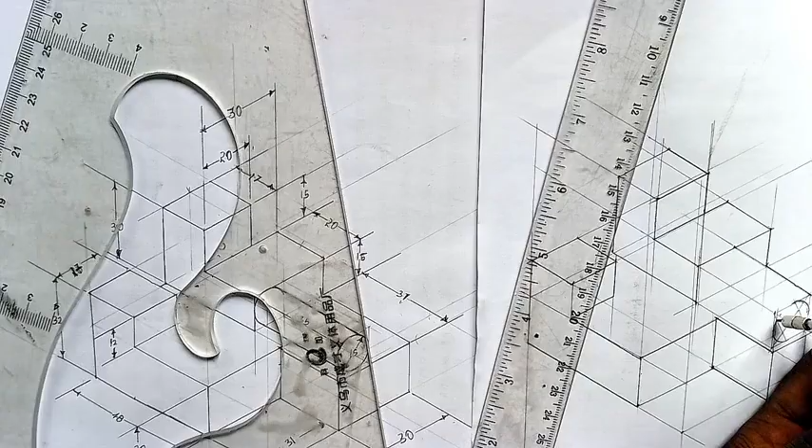Then you see also. So can you see? Now when I've done that, also the same thing I'll do for here. So for this part, I'll place it here, do it like this, can you see? Then connect this ending to this place. Can you see? So all I need is that if I do that, I'll take my 60 degree here and project this here.

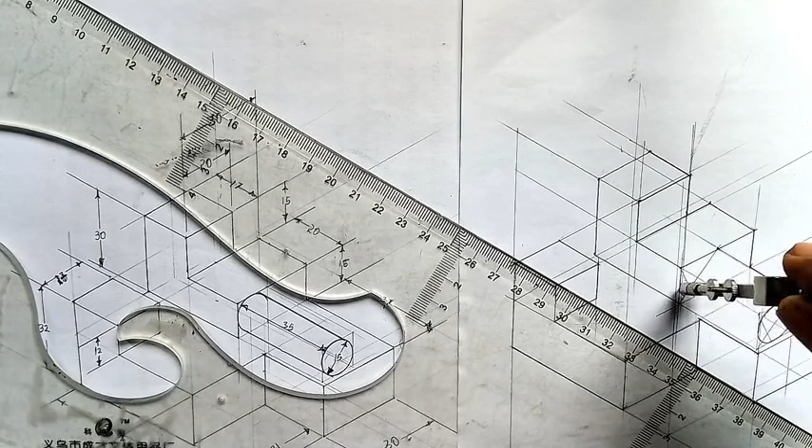Then I will come over here. Now for this one, before I reduce it. So you can see that I've reduced it to this point here. So here, what happens is that just taking here. Can you see? Just taking there. Then I will extend my compass to this point. So the same thing here. When I do that, I didn't forget to do this part also.

What I'll do is take my compass and draw a line like this. So when I draw a line, I know where I put my point. So this is my point here. Then I'll do this here. Then show this one here and extend it to the point.

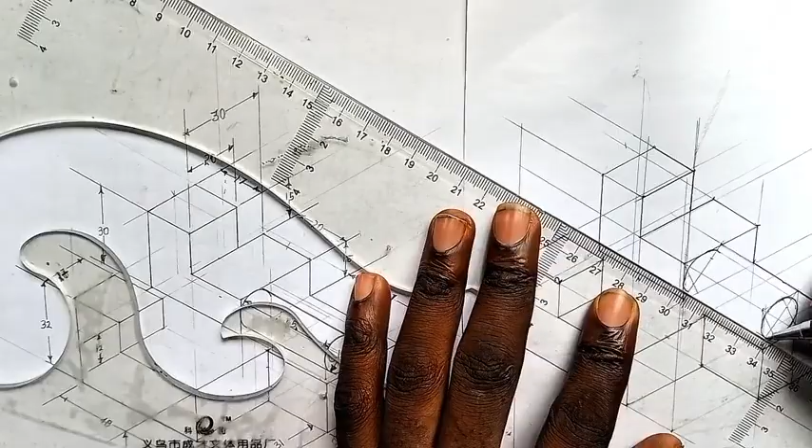So can you see? So when I do that, then I'll come over and join it. I'll join this part, join this part. So can you see? Then you need to take in this part. So this is how to solve, then taking this one here, solve this problem. Thank you.